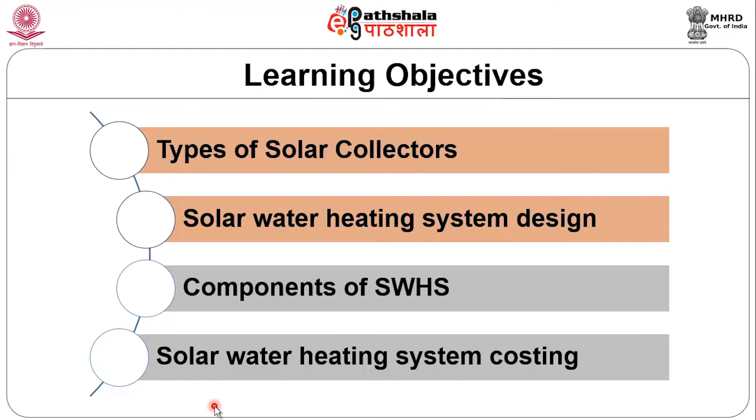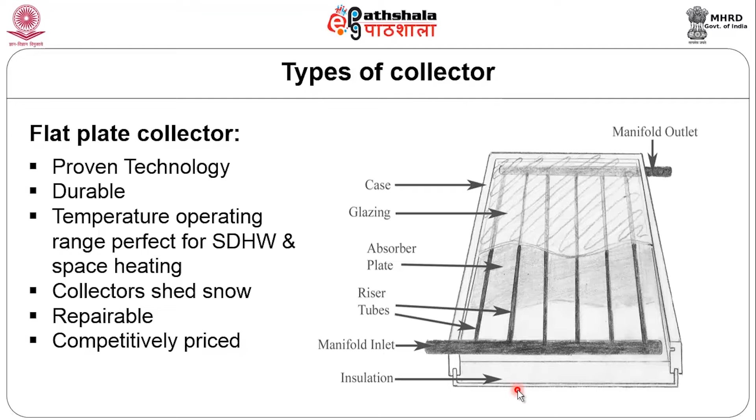This is the shape of the collector: the case and glazing at the top, absorber plate at the bottom which is black coated, and through these tubes water flows. This is manifold inlet and manifold outlet, and it has to be properly insulated to avoid heat wastage.

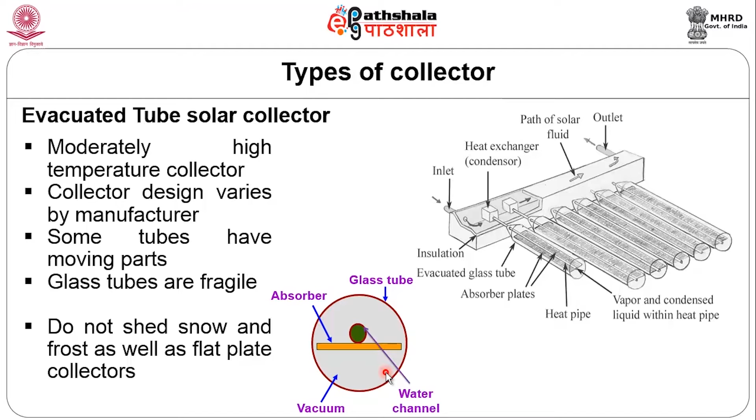The collector design varies according to the manufacturer. Some tubes may have moving components, and glass tubes are fragile in nature. Through this collector we can go for higher temperature, up to 100 degrees Celsius, whereas in the flat plate collector you can go up to 70 to 80 degrees Celsius.

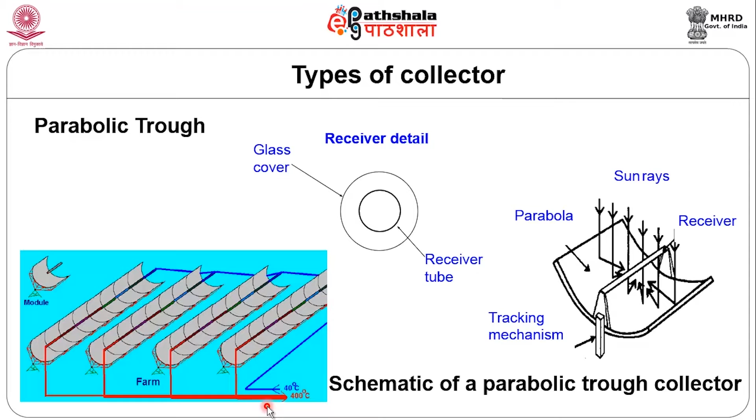Here the water going inside, that is the blue line, is about atmospheric temperature, and it goes through the receivers all the way. Then the red line comes out with higher temperature. This is mainly for power generation application as well as for industrial application, the parabolic trough collector.

This is another one, the parabolic trough collector, this is the evacuated tube collector, and this is a glazed flat plate collector. These are the various collectors available. People do research and change the pattern of the collectors in order to improve the performance of the solar water heating system.

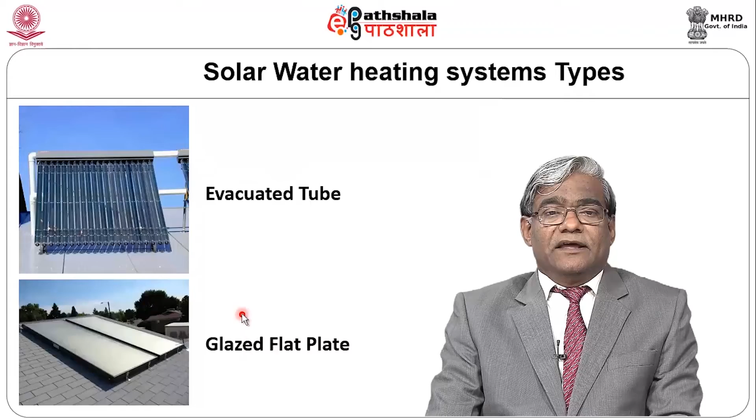In the flat plate collector, in some designs the water flows directly in the tube and gets heated up. In other systems, that is indirect systems, for high mass flow rate or higher temperature applications, there will be a heat exchanger, and heat could be transferred from distilled water to the water, or from some thermal fluid to the water.

So here we see active system and passive system. The active system will have pumps, which pump heated water from the collector to the solar storage tank.

This is a passive system, where there is no pump used. It has a thermosiphon effect, and no energy is required to operate the system. In the active system, we have a pump to circulate the water, used for higher mass flow rate and for industrial application.

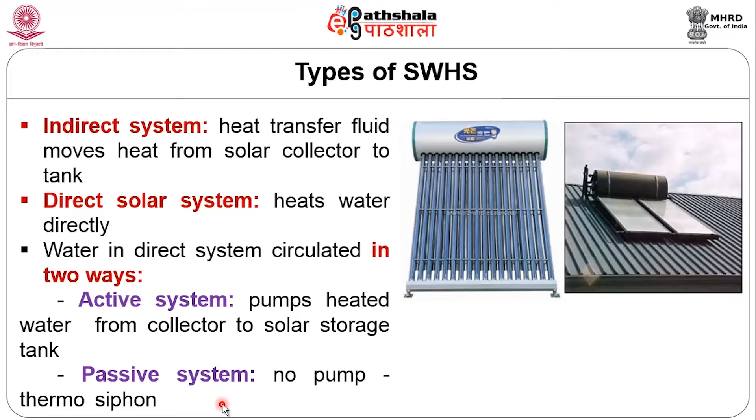For the domestic purpose, there is no need to have the pump, and the passive system is more than sufficient.

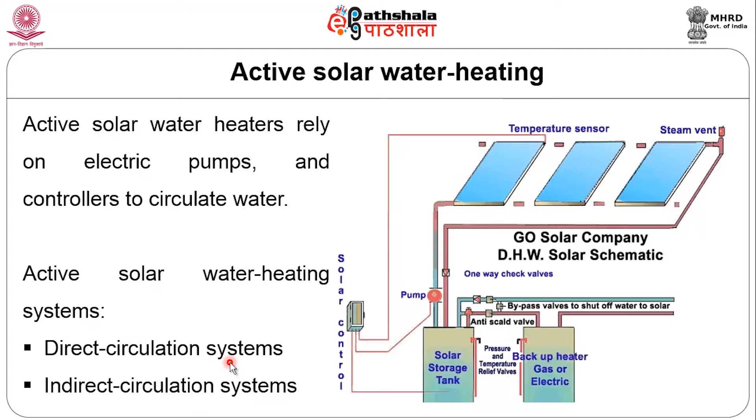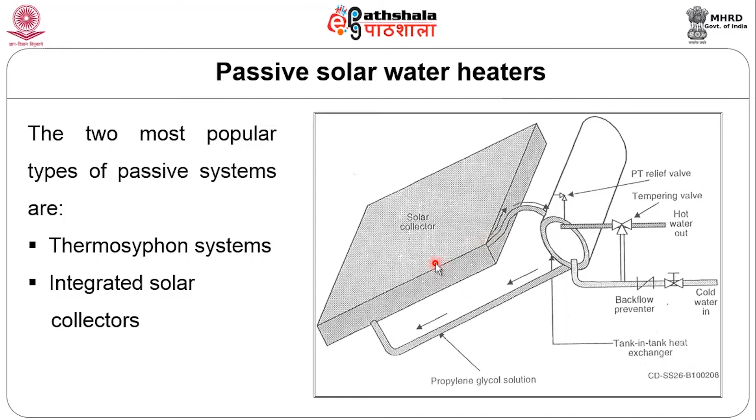Now, about passive solar water heaters — the two most popular types of passive systems are thermosiphon and integrated collector systems. These do not have any pump; the water flows because of the density difference in the water, since when the temperature increases, the density decreases. Because of this density difference, the water circulates automatically, and that is the passive solar water heating system.

Regarding efficiency aspects of the solar water heating system: colder water supply temperatures increase system efficiency, since the fluid being heated loses less heat to the surrounding air until it reaches higher temperatures. Colder air temperatures reduce system efficiency by increasing the loss of heat from the collectors to the air.

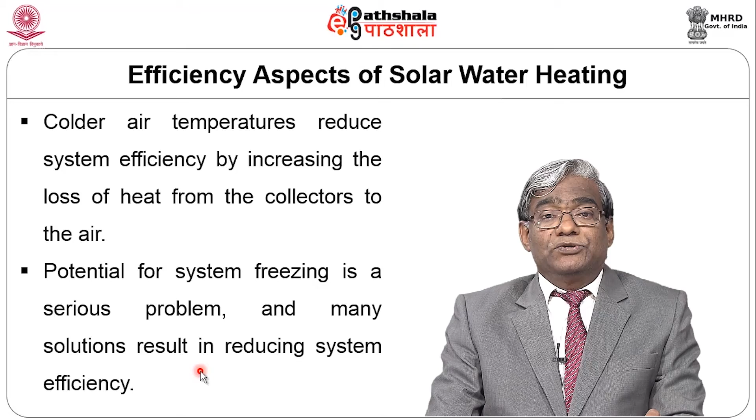The potential for system freezing is a serious problem, and many solutions result in reducing system efficiency. These are the methodologies to increase the system efficiency of solar water heating systems.

Here we see some typical temperature ranges and efficiencies of water heating systems. This is about flat plate water heating — it accepts both direct radiation and diffused radiation, that is global radiation, and the temperature range goes up to 40 to 60 degrees Celsius, with efficiency in the order of 40%.

When we go for evacuated tube water heating, it accepts global radiation, that is direct and diffused radiation, and you can go for higher temperatures from 50 to 80 degrees. The efficiency is in the order of 50%.

Evacuated tube with other fluid and low concentration ratio accepts only direct radiation. The temperature can go up to 100 to 200 degrees Celsius, with efficiency in the order of 50 to 60%.

The cylindrical parabolic collector, or parabolic trough collector, accepts only direct radiation, not diffuse radiation, and the temperature can go up to 100 to 400 degrees Celsius.

Efficiency is further improved, at 50 to 60%. The parabolic point focus system accepts only direct radiation, and you can go up to 1000 degrees Celsius, with efficiency improved to the order of 70 to 80% — that is the parabolic point focus. These are the various systems, giving various output temperatures and efficiency factors.

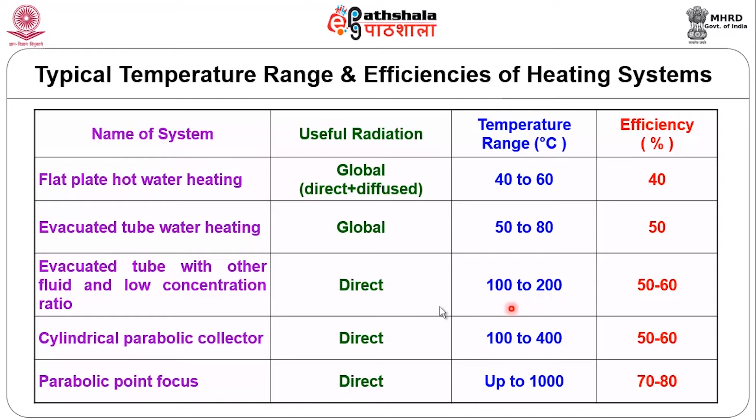Now we are going to discuss the design of a water heating system, specifically for about 250 liters, for a small family of 4 to 5 people. 250 liters of hot water may be sufficient for bathing as well as kitchen purposes.

This is step number 1 to design the solar water heating system. It is very simple — we have taken a small family of 4 to 5 people, who may require about 250 liters in a day.

In step number 1, we have to measure the daily available solar radiation, which is about 5.5 kilowatt hours per meter square in a day. There are instruments to measure solar radiation: the pyrheliometer measures direct radiation, and the pyranometer measures global radiation. So the pyranometer can be used to measure the solar global radiation, giving us the average solar radiation of about 5.5 units per meter square in a day.

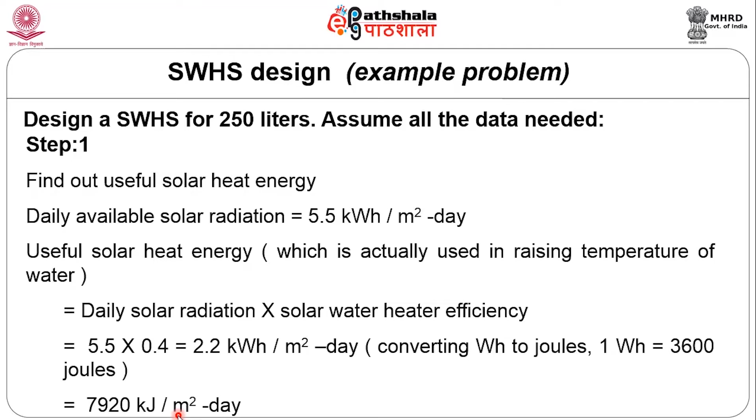Converting the watt hour to joules, 1 watt hour is about 3600 joules. So we are converting the electrical energy unit into heat energy unit, that is 7920 kilojoules per meter square in a day. That is the useful energy available for the solar water heating system.

Step number 2: the heat required to bring the water from ambient to desired temperature. The heat capacity of water is 4.18 kilojoule per kg per degree rise in temperature. The delta or rise in temperature required is about 80 degrees minus ambient temperature of 30, so the difference is 50 degrees Celsius. The mass of water, 1 liter equals 1 kg, but we need 250 liters. Heat energy required to raise water temperature to the desired level every day: 4.18 is the heat carrying capacity of water, mass flow rate is 250 liters for the family, and delta T is 50 degrees Celsius. Multiplying all these, we get about 52,250 kilojoules required per day.

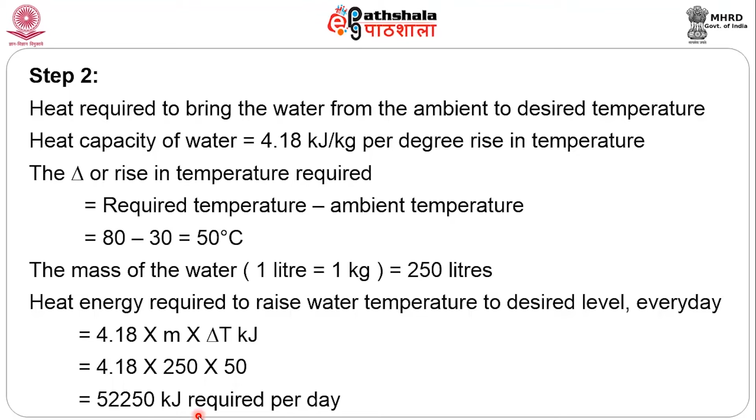That is the energy requirement per day, 52,250 kilojoules. Step number 3: through this we calculate the collector area required to fulfill the requirement. Collector area required equals required heat energy, 52,250, divided by useful heat energy from step number 1. When we divide this, we get the collector area of 7 meters squared. So to have 250 liters of water heated up to 80 degrees Celsius, we need 7 meters squared of collector area.

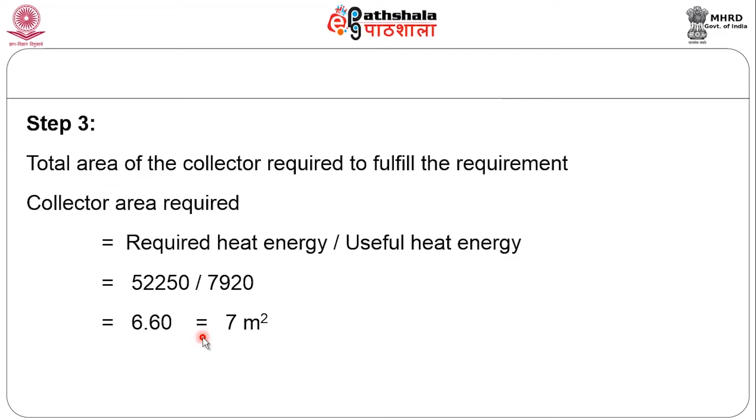Costing of solar water heater: in order to estimate the cost, the following rules can be used. The typical price of the collector is about rupees 5,000 per square meter. The tank and other installation cost is about 50% of the collector's cost. Thus cost of a 250 liter hot water per day system is 7 meter square collector area into 5,000 rupees per square meter plus half of 5,000 for installation cost.

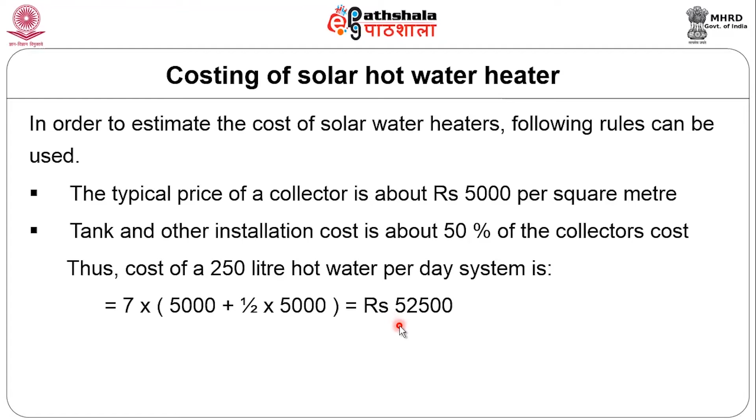That is the total cost required to install the water heating system for 250 liters of water at 80 degrees Celsius, which is about 52,500. This is simple payback period, and the life of a water heating system is about 15 to 20 years. During this period, a significant amount of electricity can be saved, which in turn is saving money.

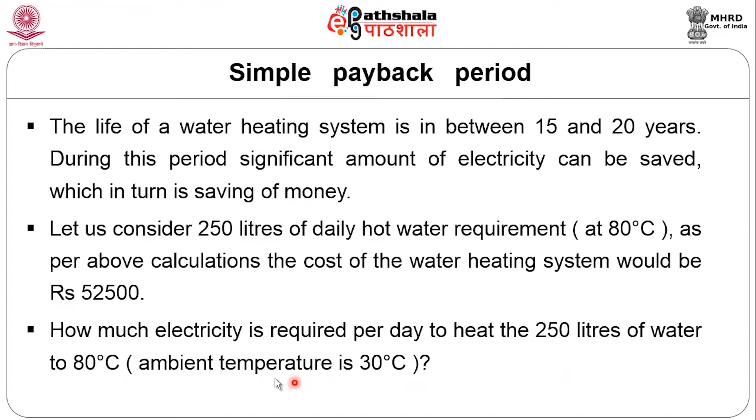This is the calculation of payback period. Let us consider 250 liters of daily hot water requirement at 80 degrees Celsius. As per the calculation, the cost of the water heating system would be about 52,500. We have to find out how much electricity is required per day to heat 250 liters of water to 80 degrees Celsius from ambient temperature of 30 degrees Celsius. The heat energy requirement is 4.18, the heat capacity of water, into 250 liters, into the difference between 80 and 30 degrees. Then we need 52,250 kilojoules. So we are converting that heat unit into electrical units, where 1 watt hour equals 3,600 joules. Therefore, electrical units required per day is about...

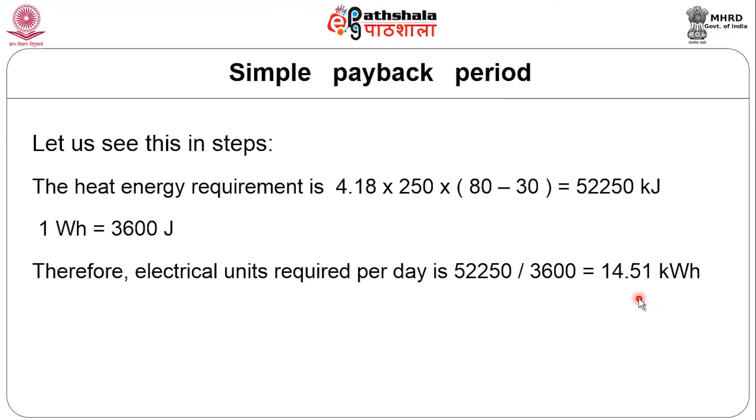14.51 kilowatt hours, but the efficiency of the electric water heater is about 90%. Therefore actual electrical energy supplied is 14.51 divided by 0.9, giving about 16.41 units of electricity. Considering the cost of an electrical energy unit at 5 rupees, the total cost of electricity per day is 5 into 16.12, which is about 80 rupees 63 paise.

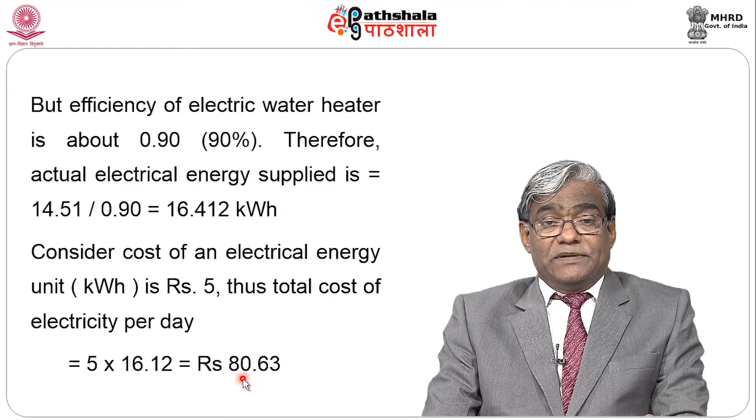So in 1 day we can save 80 rupees of electricity. Let us assume there are about 300 sunny days: 80.63 into 300 sunny days is about 24,190. The number of years in which the investment cost is earned back is investment of 52,500 divided by savings in 1 year when using solar water heating system instead of electric heater, giving a payback period of just 2.17 years. So one can see that the payback period is within 2 to 2.5 years for a water heating system.

Any system with less than 5 years of payback period is really good. So when we buy a water heating system for a family to have 250 liters of hot water at 80 degrees Celsius, we need to install a 7 meter squared collector area, and the total cost will be about 52,500. But once we stop using the electric heater, this amount can be earned back within 2 to 2.5 years, and the rest of the years is great saving. The water heating system will work for 15 to 20 years, so for about 18 years we can save enormous amounts of money by avoiding the electric heater for water heating.

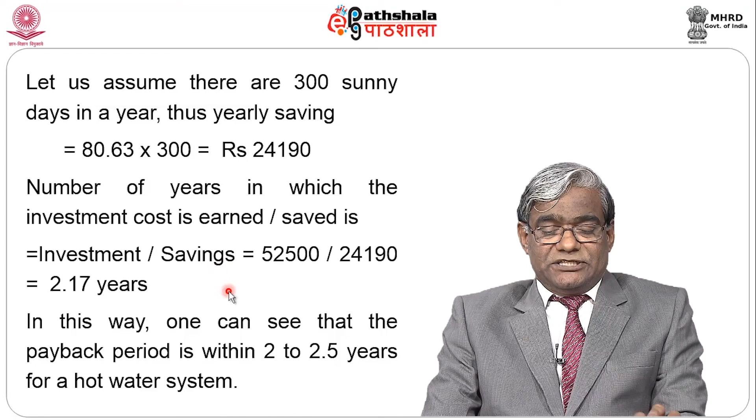Instead, for heating applications, we can use direct solar energy through a solar water heating system, which is most economical and a highly mature technology. Now let's look at solar water heating applications.

In swimming pools, with larger collector area, the water can be heated up, giving warm water during the winter season. Other applications include hot tubs and spas, domestic water heaters in office buildings, malls, hotels and motels, large laundries and kitchens, facilities in remote areas, jails, hospitals and dormitories, process hot water in the food processing industry, hot water cleanup, hot water rinses, and pre-heat boiler makeup water.

So these are the solar water heating applications, widely used in domestic as well as industry, and in various buildings like office buildings, malls, and hotels. Mainly in the hotel industry it plays a vital role.

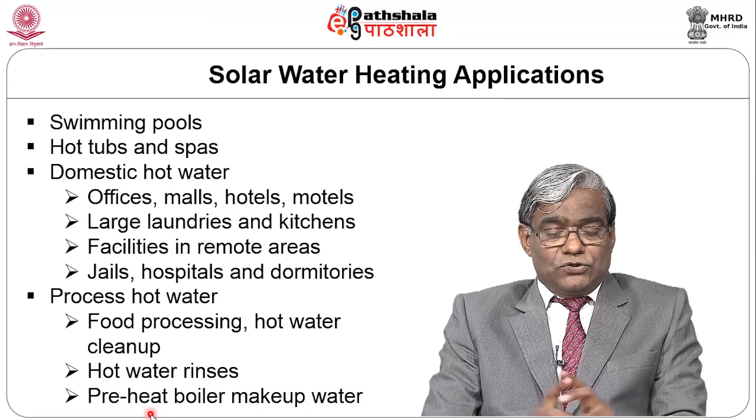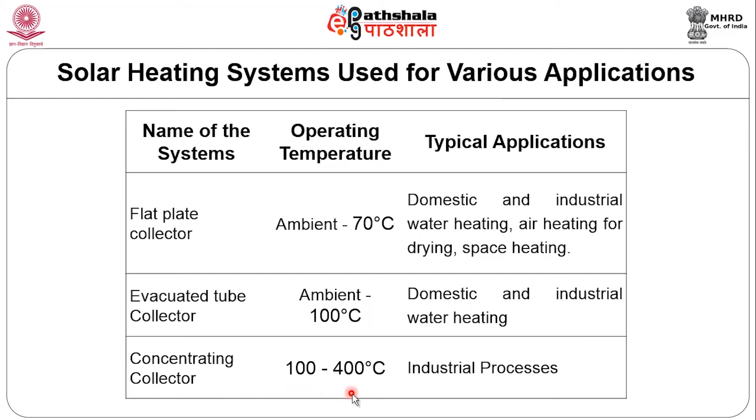This is about solar heating systems used for various applications. The flat plate collector operates at about 70 degrees Celsius, used for domestic and industrial water heating, air heating for drying, and space heating. The evacuated tube collector can go from ambient temperature to 100 degrees Celsius, used for domestic and industrial water heating. The concentrating collector goes from 100 to 400 degrees Celsius for industrial processes.

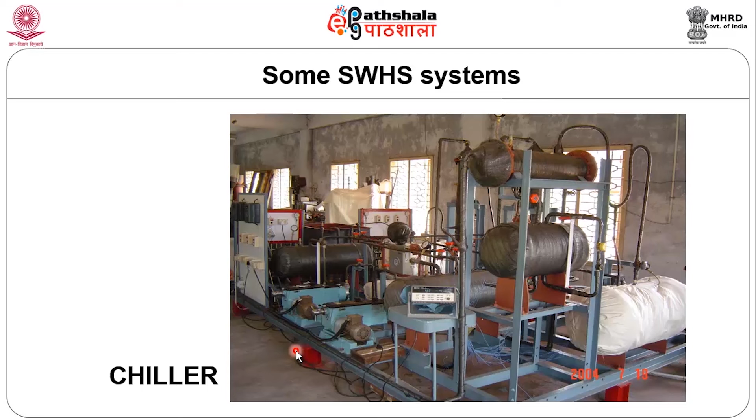This is the chiller, which also works on the vapor absorption system. The generator needs heat energy, and that heat energy is taken from hot water heated by solar energy. It's a wonderful setup, and a lot of applications are possible through hot water.

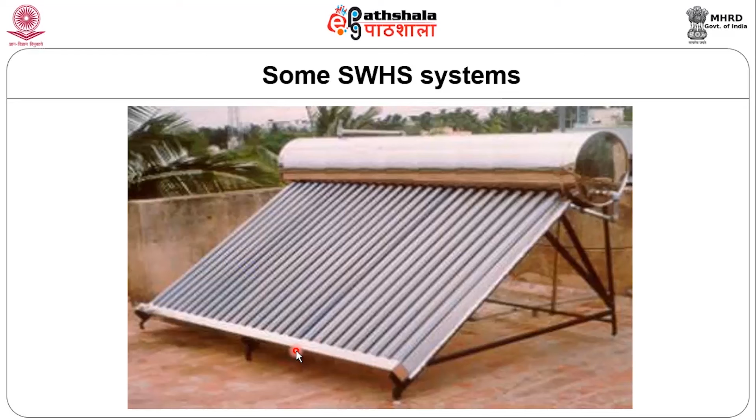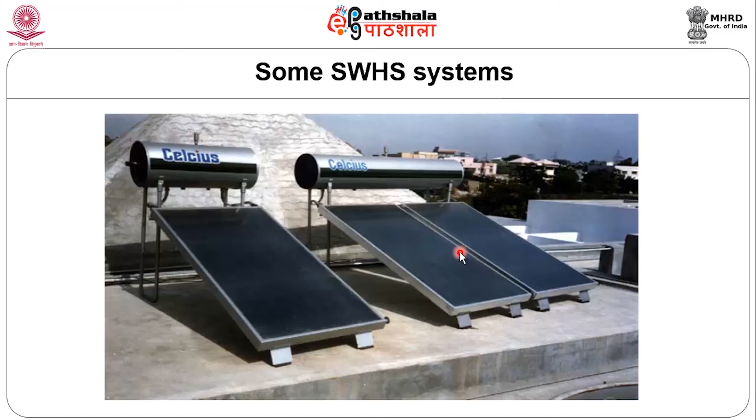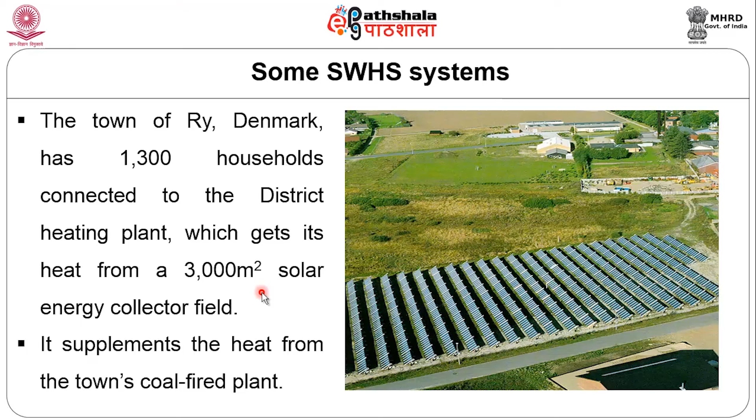This is about some solar water heating systems, from a town in Denmark that has 1,300 households connected to a district heating plant, which gets its heat from a 3,000 square meter solar energy collector. It supplements heat from the town's coal-fired plant. The households are connected and share common solar water heaters, with about 3,000 square meters of collector area, heating a huge amount of water that can be connected to various houses.

This again shows the massive size of a solar water heating system for community-type applications. The hot water can be fed to a number of houses, major industries, the hotel industry, or canteens, etc.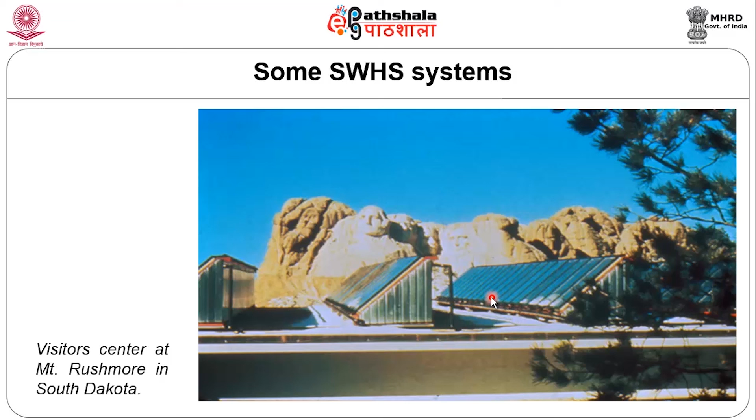To conclude, we have seen the design of water heating systems, various collectors, and various applications of solar water heating systems. It is highly cheaper in cost and a highly mature technology, and it can be utilized in the household sector, that is domestic sector, industrial sector, as well as commercial sector, to save electricity.